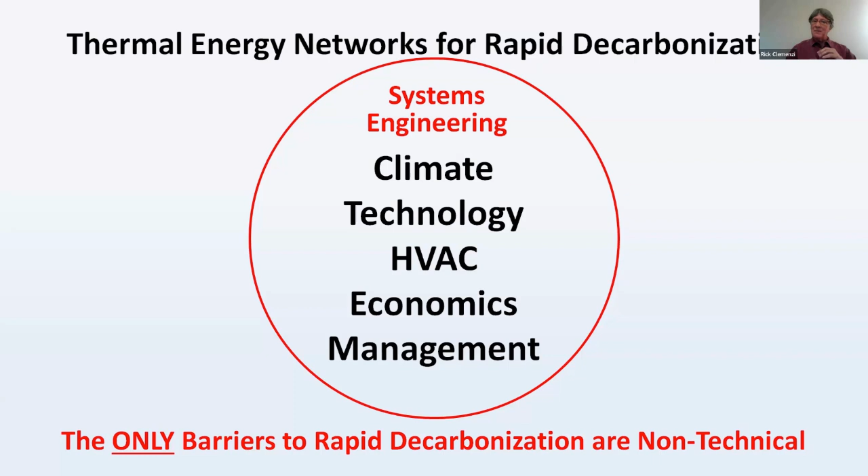Back to this original thing, there's all these different topics, and you got to think of these all together. It may not be systems engineering, it may be project management or whatever. For example, in this field, Kerry is not an engineer, okay, not a licensed engineer. He's what we call a designer in this field. You need the people who have the right experience to pull this whole thing together. That's key. The only barriers at this point, from what Kerry presented, are not technical. The thermals are out there, it's just managing the thermal, modeling it, figuring it out, and tweaking a system. The problems are all other things.

I saw this just in the news. Phil, I'm sorry to pick on you, but I saw this article that you wrote. It mentioned that Harvard is still trying to figure out how to decarbonize by 2050. And I just go, oh, come on. Clearly everybody's talking to the wrong people, because there's no way you couldn't decarbonize by 2050. You'd have to be really not trying to do it with the technologies we're talking about. And with that kind of climate thing going on with the ocean temperatures and whatnot, this is just not a problem we can all drag our feet on. So I just want to throw that in there.

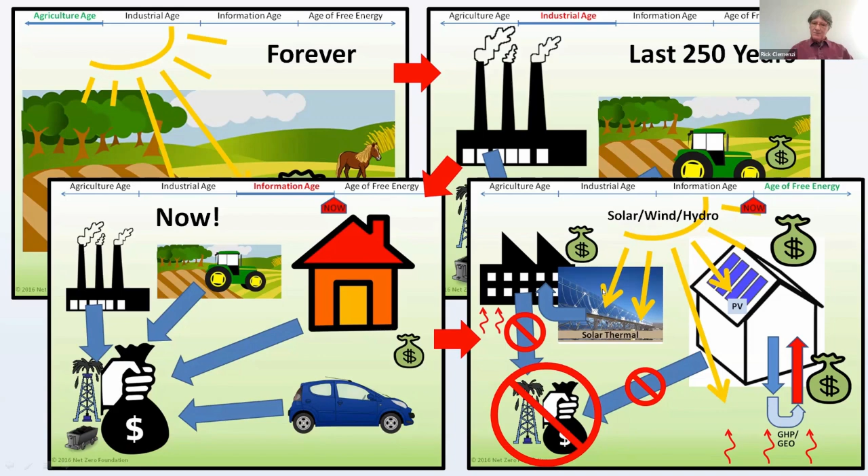Like I've said before, we sort of got used to this whole thing of paying the oil companies. The money is all there. As you saw from Kerry, these people are putting this stuff in and they're saving money. They're actually making money relative to now. What they're really doing is taking some of this money that everybody's shipping off to the fossil industry and saying, no, we're going to invest in the equipment, the geo equipment, the solar and whatnot for industry, maybe some other high temp stuff, and maybe some deep bore. And we can pull this off. The capability to pull that off is all there.

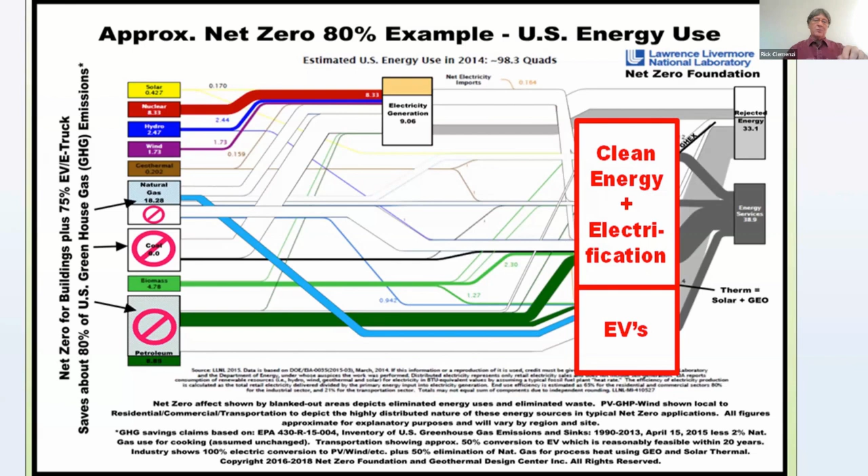I just want to run these through to keep them in your mind. The idea of eliminating all the fossil in this system, except for maybe airplanes and some ships, is all there on the table now, even for large construction equipment. And I showed this to you before, 13 years. It's happened before, a massive, complete change in 13 years. It can totally be done.

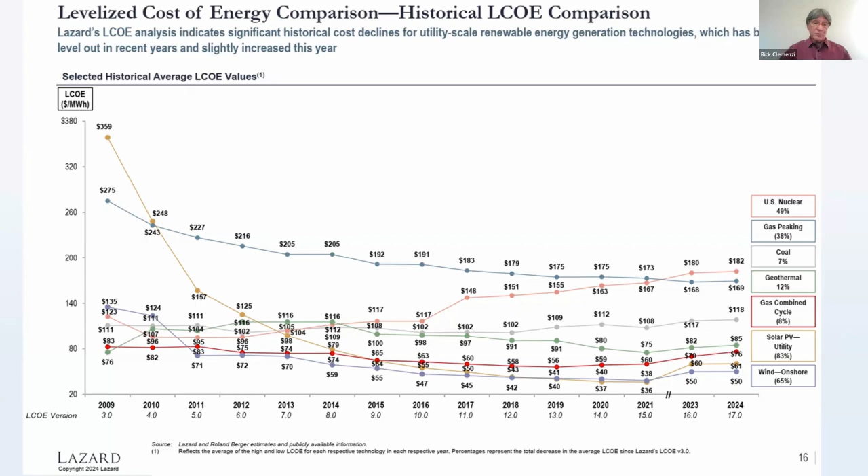Solar, this is the curve of solar. You see this exponentially declining curve, solar, starting in 2009. That's because the government figured out that this was a total winning situation back then and invested a bunch of money to get solar into bigger production. It just broke the ice and broke the whole thing open. So that's this curve, 2009, 2010, down to now, okay, somewhere in here. I'm sorry, these graphs are a little old.

This is exactly what happened with microprocessors in the 70s. I was in high school in 74, and the Intel 8080 microprocessor, one of those 40-pin things, was the first real microprocessor computer on a chip. It launched maybe in 73, and by 74 they were like $250. I made it my senior project because I was watching the price come down. By the time I bought one, in 74 sometime, it was $125 - it had already dropped 50%.

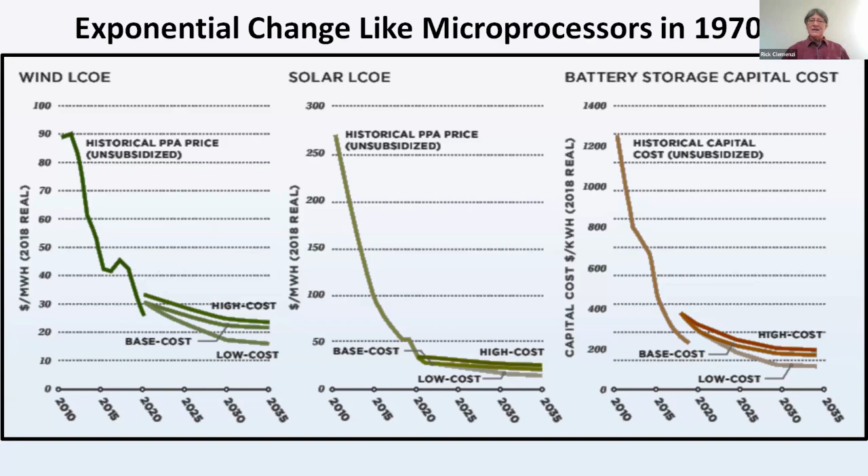Now that is clearly what started the information age. And along the way, a couple of things have gotten added - the internet, the TCP layers got added in the 90s, and now we've got fiber and everything.

But what these exponential curves are about - this was Andy Grove, one of the three founders of Intel. The whole thing, like Moore's Law - you've heard of Moore's Law, things in the computer industry keep doubling and halving in price. That's another one of the three founders of Intel. Andy Grove wrote a little book called Only the Paranoid Survive, on how to deal with inflection points.

When you see an inflection point, you should jump on board and realize the world has changed around you, because you can't fight those fundamental changes when things go really wild and drop in price by 90%, like solar has. That is a fundamental change, and it's going to fundamentally change stuff. And you can see it's totally happening.

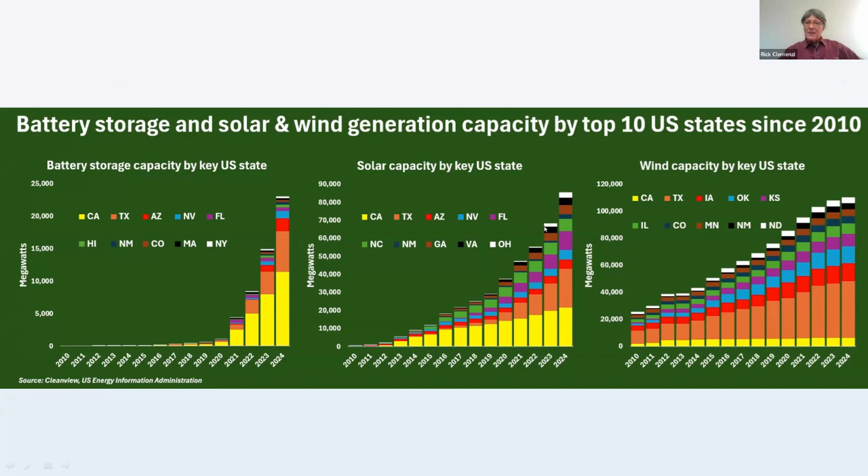This is what's happening with battery storage right now - it's just unbelievable, through the roof. This is what's still happening with solar - it's still exponential. We're being constrained now by the limit of the polysilicon market, by actually mining the materials - that's the only real limiting factor going on.

You guys are going to go see one of these net zero schools here soon. I don't know about King Open, but a lot of these places are doing this all with individual units, which essentially form a distributed network in the school. A two-pipe ambient loop just runs around the ceilings of the hallways, and you hang these units off with pumps built into them - they actually have no central pumping even in a lot of that situation.

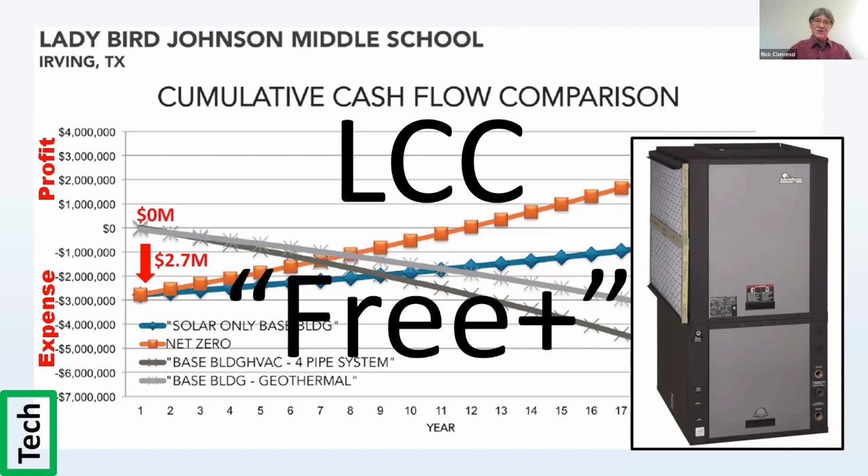So this is what I'm just trying to say - be confident. This change is afoot, and it's not slowing down. It is going to happen. And all of the people who haven't caught on yet, we just have to run past them, because they will catch on, but it's clearly taking them a while.

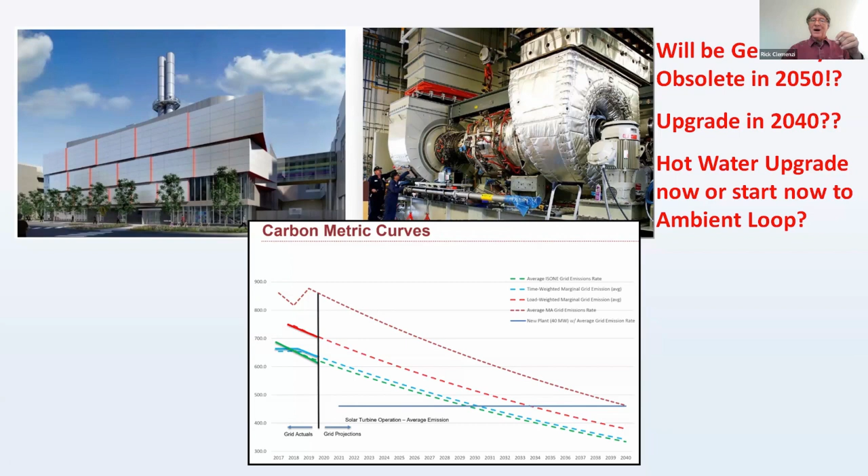So this technology of a jet engine - that's a jet engine, which is what MIT has in its central plant. It was a great, wonderful technology for what it was and is, which is a fossil fuel-based energy source. Perfect for that. Might be perfect for peaking and dealing with odd situations - something goes down, this or that, forever it could be. But it is essentially functionally obsolete now. You would never go and buy another one of these and put it in. Although there's a few industries doing that, but not campuses anymore.

So I'm sorry, I got a copy here and something. Back to the barriers - building decarbonization barriers. Why wouldn't you do this stuff, like Cary presented, these ambient loop systems?

They'll massively save money. There's huge rebates. They're less expensive to maintain, less expensive to replace. And any of the stuff you put in the ground is going to outlast your buildings, because this pipe, nobody has any idea how long it will last, but it's lasted its entire life, which is like 60-something years at this point.

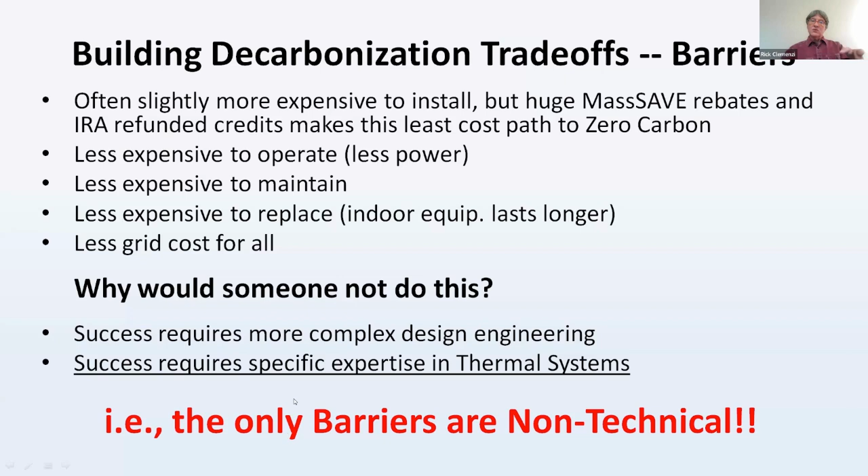So why wouldn't you do it? Because it's more complex, and we just got to keep teaching people. We got to keep telling people about this and getting them in touch with the right individuals who have the experience. The barriers are all non-technical.

Anyway, I just wanted to point out, back in 2016, the reason we're kind of here is we came with this knowledge. I'd been hearing these guys talk at the International Ground Source Heat Pump Association conferences. And once I saw that these schools are making money, it was like, okay, I can see this is a done deal. This is a concept breaker.

And so we came in 2016 naively thinking that we could go present this to MIT, and we got selected by the faculty to get this award for this in 2016, the Climate CoLab. And you can see from this little simple drawing, we sort of drew basically the same thing you've seen Cary draw. You got a network, and you got all the buildings and stuff hanging off of it.

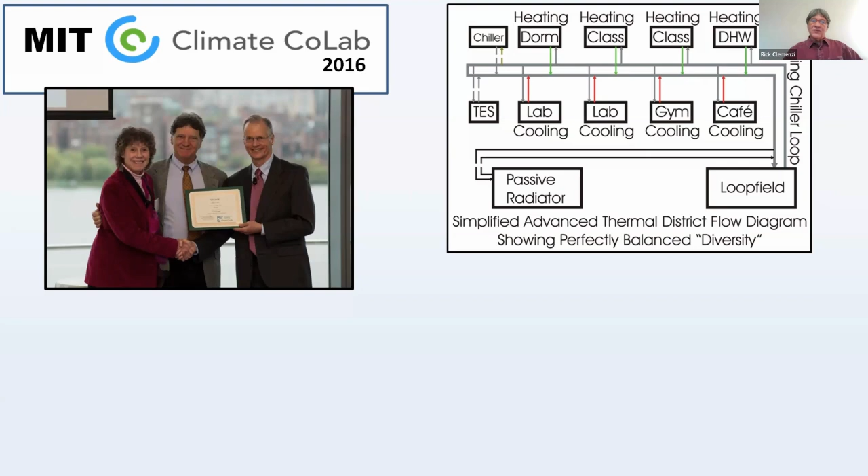Well, here we are 8 years later, and I think finally this year we're finally achieving some kind of breakthrough. And it's taken forever.

And we even gave them all these people. Look, Cary Smith, you recognize all these. Now Susan's taken the course from Ed Lohrenz. You just met Cary Smith. He's met Carl Orio. And the only person you haven't met here is Don Penn, and he's the guy who did the Lady Bird Johnson School and said, get rid of the steel. And now the industry doesn't use steel. So Rick recommended all of these people who are leaders in the industry in 2016.

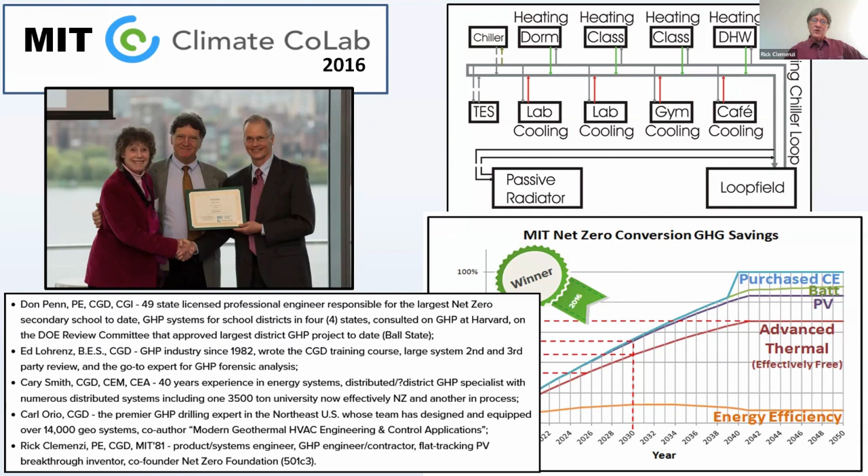It's amazing, 2016, put it all on the table. And really the program that you're going to learn about next, the proposal we've got on the table is really unchanged from 2016. It's just a little refined.

So even back in 2016, this was a graph of the economics—sorry, what's going on with the mouse here? Here we go. There we go. Even back in 2016, we were showing that geothermal had passed this effectively free moment, but PV had not. Well, believe me, PV has passed that effectively free moment at this point. So in 8 years, it has totally moved past this, and batteries have moved down here.

These things all have people investing in batteries because guess what? They make money. That means they are below this cost-benefit line. These things are rapidly moving down this technology progress curve and becoming economical, just in 8 years.

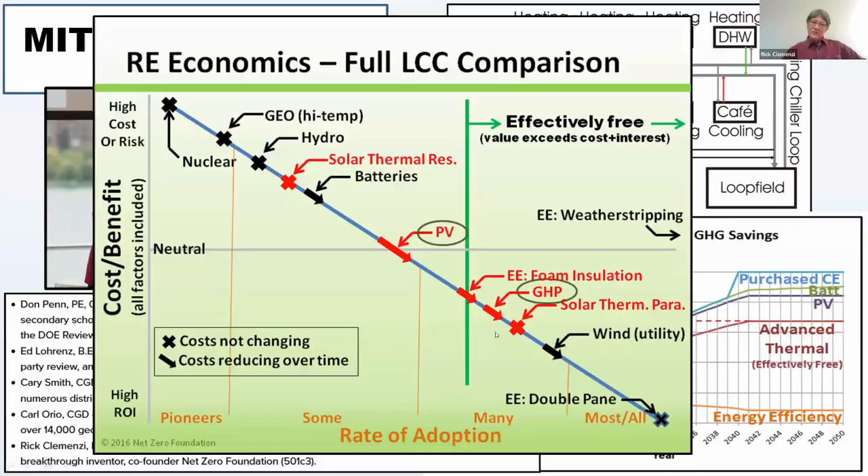And a key thing in this business is, like I was mentioning just before, you need the designer, the person who understands how to model these systems. They're more complex. It's not the guy who draws the plans that you really need. Why's the mouse disappear? It's not this guy that you really need.

You need the designer. And that's what the missing piece is, because, for example, the administration at MIT—point no fingers, because this is literally everywhere—the people we talk to in Asheville, everyone in this business talks to, it's the same issue: you go and you ask your engineer, well, what about this geothermal thing? And they don't know about it. So they give you answers that are incorrect.

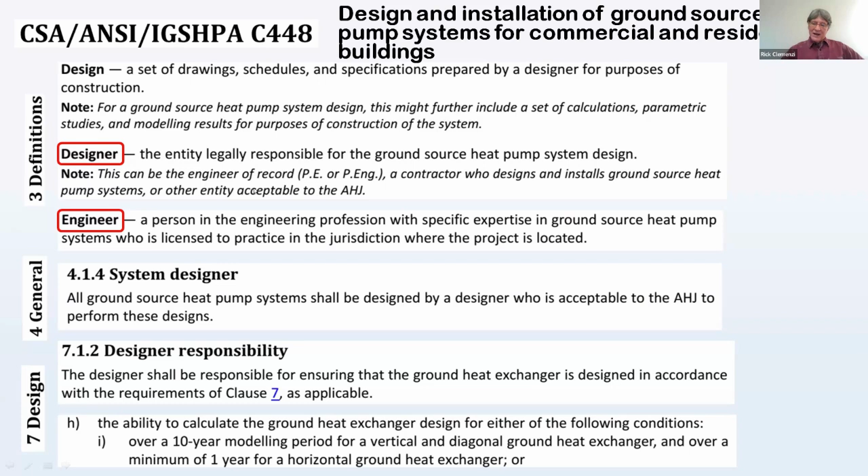Anyway, this is from the standard that's coming out. So if you all ever end up working with any governments or whatever on these kinds of advanced thermal systems, this is how you guarantee that something gets done right. You cite the standard. And this standard, the new version of the standard, the ballot's out right now, so it'll be out within a month, I think.

Question came up last week about St. Patrick's, so I thought I'd start here with New York. One of the advances that's happened in this industry is that this guy, Bob Wyman, was a Google plant. He got supported by Google to show up in the industry and started learning from everyone, smart computer guy. And so this is now the former mayor of New York signing a resolution that made it so all new New York buildings and major retrofits had to use geothermal unless engineers could show something else was more economical. The reason was because Bob figured out the issue here was non-technical. All the barriers are non-technical. So this basically said, okay, we're taking all these non-technical issues off the table, we're just going to mandate it, and then you guys figure it out and come up with something else. So that was a major thing, and that's kind of like the first step.

If you want to decarbonize, essentially what you do—this is about geothermal, but I'm really not trying to focus on geothermal here, this really is about advanced thermal. And the number one thing to do is to say, look, people, go figure out how to decarbonize these buildings. Then it's on the engineers to figure it out. And that is really the right thing to do.

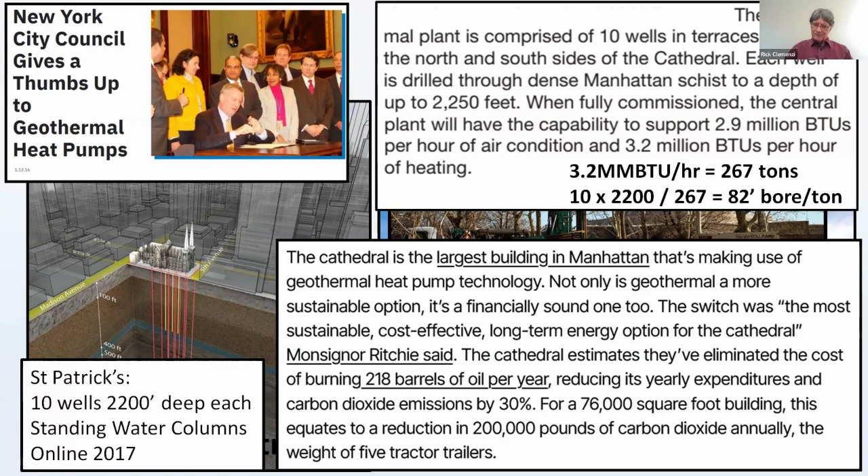St. Patrick's, I think I've got some stats here on it. St. Patrick's is 10 wells, 2,200 feet deep each, and they're standing water columns. It was done in 2017, came online in 2017. I just got a few stats here, you can look at these later in the slides if you really want. But it was completely successful. And in Manhattan, you've got very little space, so you do a different kind of thing—you do these very deep bores, and standing water column means that you bleed off a little bit if they get out of temperature. It's one of the technologies.

Folks at Susan's class also asked about the finance, so I thought it'd be good to show you this. Who knows if the IRA is going to survive, we'll see. However, the vast majority of the money—well, I don't know about the vast majority, but for sure the majority—has gone to red states, so it just might survive.

As an example, there's a workup on the spreadsheet from Climate Master, one of the major manufacturers, the people who make the most commercial geothermal equipment. This is for non-tax entities, like state governments and schools like MIT. We've got a geothermal system here that was going to cost, as an example, 1.1 million for conventional and 1.6 million for geothermal. So that's a $500,000 additive for the loop field and such, and there's some utility rebates, so that was going to cost 500,000 more.

But oops, I thought I had something else in there, I lost it—it was in Massachusetts. This is actually better, in that there's like a several hundred thousand dollar rebate, so $4,500 a ton right now in Massachusetts for pure geothermal.

And these are the tax credits in the IRA. This is the Inflation Reduction Act. There's a 30% for geothermal, solar, wind, all those kind of technologies, all those renewables. There's a 10% for domestic manufacturing, of which all the people who manufacture geothermal in this country are in the States. And there's a 10% if you've got a brownfield or something like that. That's actually for anyone who's even in a census tract around a power plant that used coal and was shut down. We have that here in Asheville.

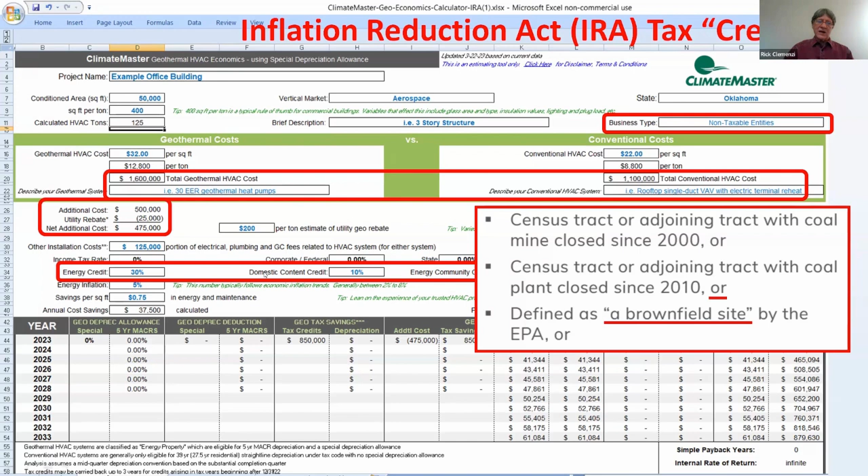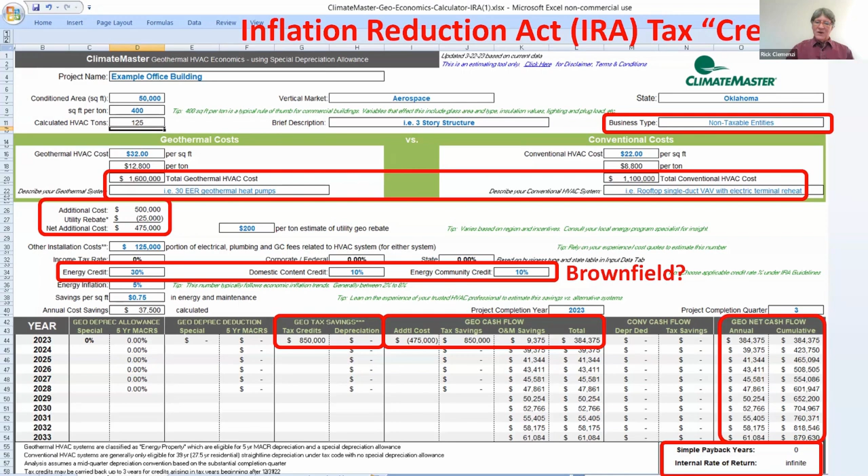And the bottom line is, in this case, with all those figures, the addition is $850,000, which is more than the $400-something thousand. So there's a net savings from day one. That's the way this works. So this is a profit from day one for anybody who can claim this. And it doesn't matter whether you're a nonprofit or, I think I have another screen here, a for-profit with taxes and whatnot. With this IRA, a lot of these geothermals are profit from day one.

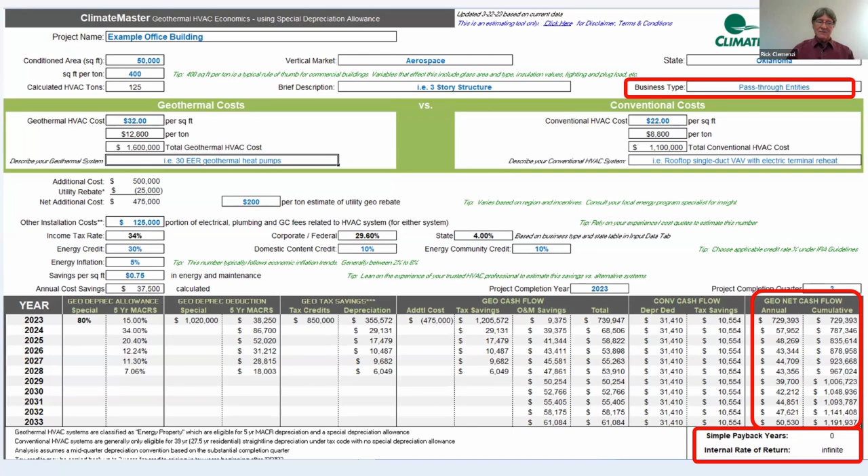And that's exactly what the government was trying to do, is to say, let's juice this system just a little bit, get it going, get people on the road to decarbonize. And I think it's happening, because I'll tell you, the geothermal business is like the volume got turned up bad. So that's good.

If you want to learn more about these things, there's a tax compendium by a guy in Boston who's a tax attorney. He has a list of all the credits. You can go there and get it from him. He'll gladly email it to you, or it's on his website. And in the geothermal business, if you really want to know about geothermal and building decarbonization, that kind of stuff, this guy, Jacob Goldman with Energy Tax Savers, he's the go-to guy. He presents at all these conferences. He really knows all this stuff, and he's got package deals for him to do the accounting for it.

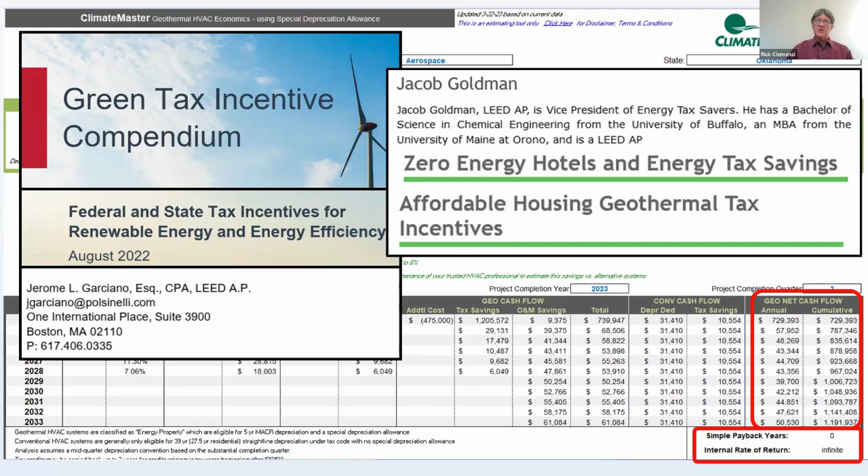Anyway, there was another question about. Yeah, you got 5 minutes, 7 minutes, maybe. Really? That's all? Yeah, okay, because we have to get there by 4 in order to have daylight on the roofs when we see the solar PV. Okay. And down to the cars, and we have to find our way there.

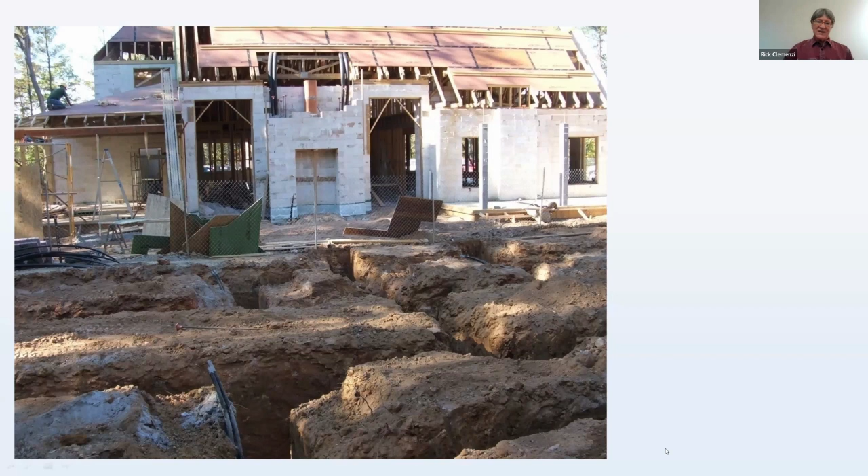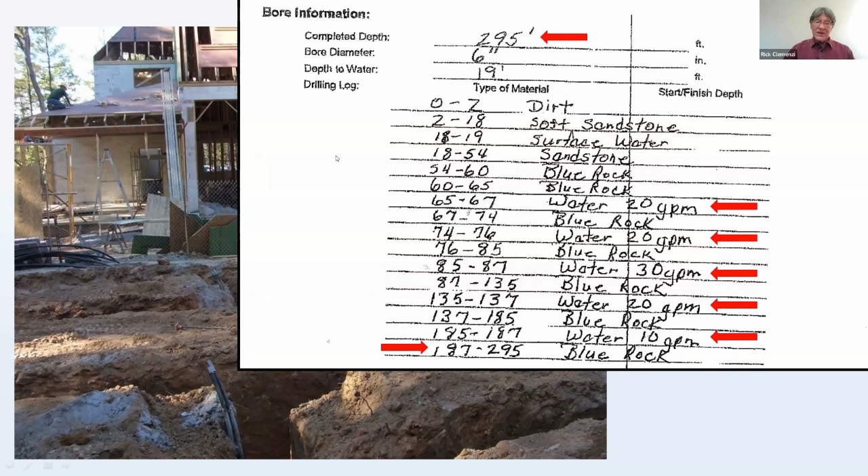Yeah. So another barrier is engineers who don't know what they're doing. This is an example of a job we got doing the chancellor's house at a university. And this engineer, this thing of digging all these trenches like this, it's insane. But that's what this engineer did. Some more insanity of the engineers who don't know this stuff. Here's an example of a well log for another job. And you'll notice water. Okay, so there's a lot of water coming out of this ground. And it's only, I'm sorry, I've got this thing blocked, it's only 300 feet deep. So then the guy goes and specs the job at 450 feet without having even drilled a 450-foot bore.

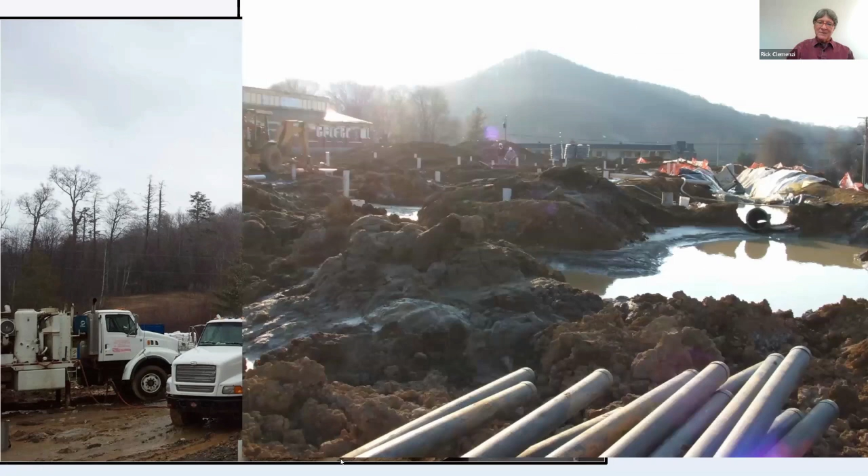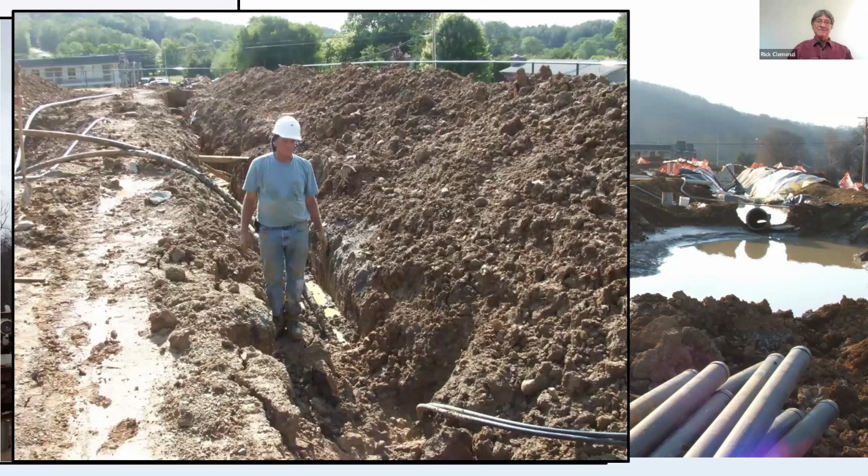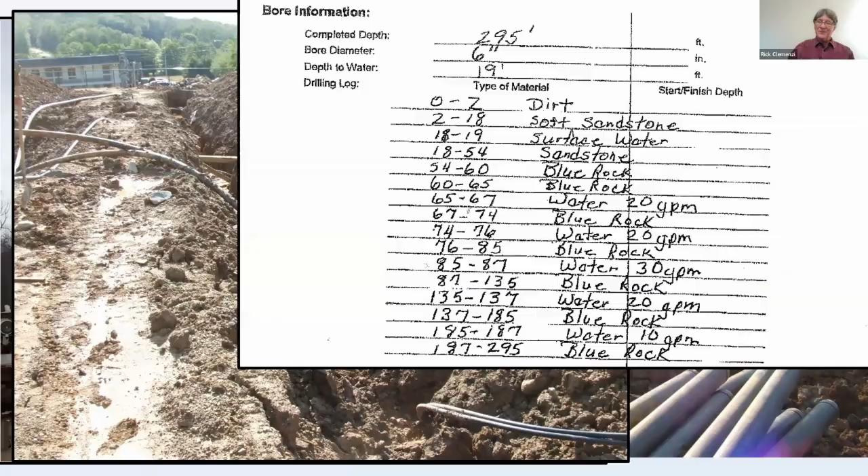And the job turned into this. So this truck over here is drilling air rotary and blowing air into the loop, the water down there at depth, and it's geysering up over here, and you can see rocks. There's rocks coming out and raining down on this truck, sitting on top of the truck. It's the most insane thing I've ever seen. It's a total disaster. And the disaster was because the engineers just go and do their thing without actually learning about this field, and they caused this. This poor driller lost his shirt on this. We lost our shirt on this too, which was bad. That's collapsed, wet, muddy ground. You can't dig in it. It's just a disaster.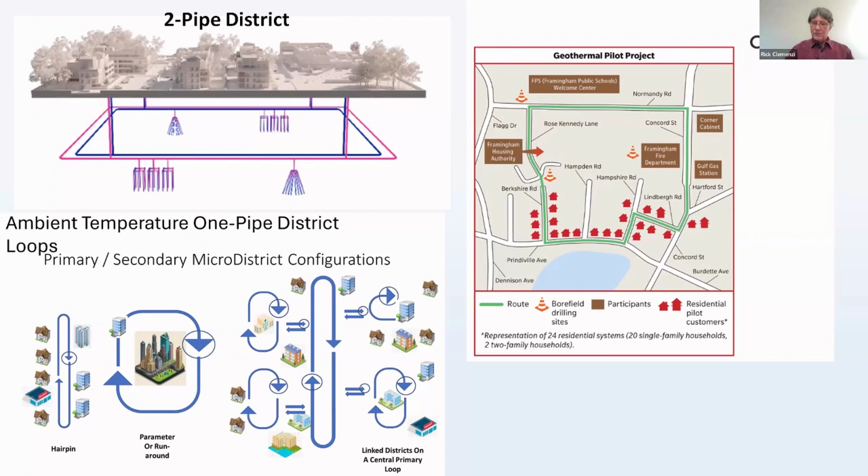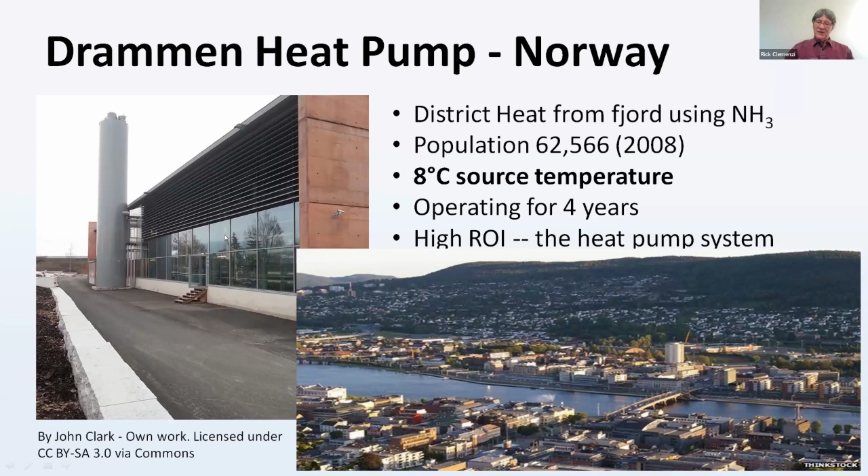Let's move on to some really out-there things. This is in Norway, off a fjord, so you know how cold that's got to be. This is a giant heat pump in this building, a giant electric heat pump. It actually produces some really hot water out of this thing.

It's not very efficient. See, this is temperature out, temperature in, and these are the efficiencies. This is almost a generic graph about heat pumps. If I'm coming in at 40 degrees and going out at 60 degrees, I can get really good efficiency out of the thing. But if I'm coming in at Boston Harbor temperatures and trying to produce really hot water, the thing is barely going to work. Understanding this curve about heat pumps - this is a particular model, but understanding how these temperatures relate - is of course critical.

For example, one thing that's happened lately is somebody asked engineers, can you create steam from geothermal? The answer is no. I mean, you can, but it's not efficient. So if you're going to decarbonize, you've got to separate these concepts - efficiency matters.

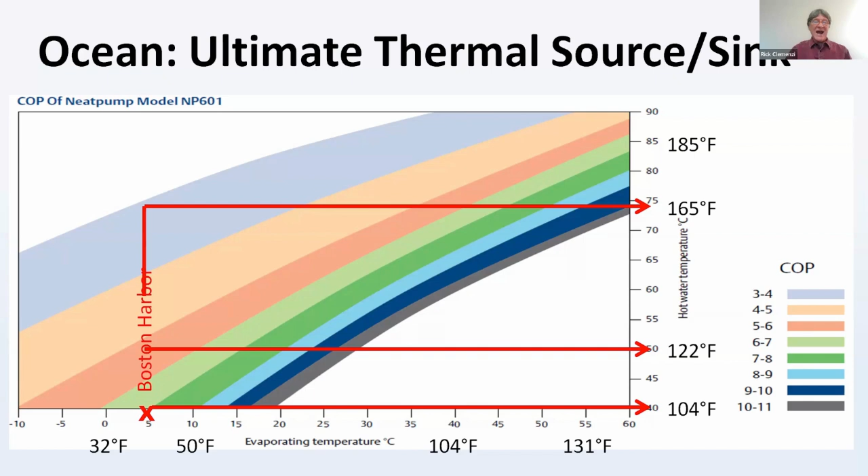I know this is a mosh of stuff. I just want to give you a sense of all these different aspects so you realize there are people who understand this, and those are the people you have to have involved. Because unfortunately, if you don't understand it, you don't.

Here's a great example, Susan, of not much geothermal. This is a giant IKEA store - you can see the size of the cars, it's very big, 3 stories tall. It's got like 4 or 5 restaurants in it in Denver. The problem here is not getting heat - it's in Denver, so it's cold, right? The problem is they've got too much heat in this building. A giant box with a bunch of restaurants - they have too much heat.

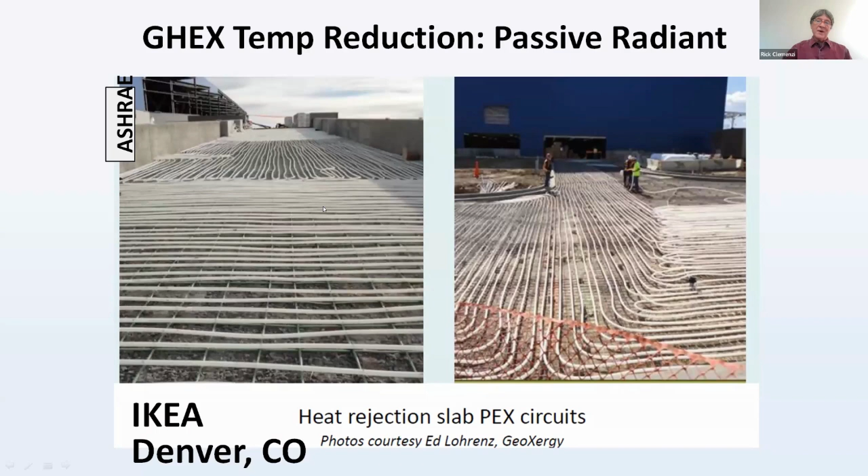So this entire huge building has something like 27 geothermal bores. 27 bores is like nothing in a building like this, but it's got this giant thermal radiator for getting rid of heat. This is under one of these concrete ramps, around the back somewhere. In the concrete are PEX loops acting as the thermal radiator to get rid of heat. So there's another source - a thermal radiator. In Massachusetts, you'd put loops under all your sidewalks, handicap parking places, crosswalks, stuff like that, to do snow melt. That's how you get rid of heat.

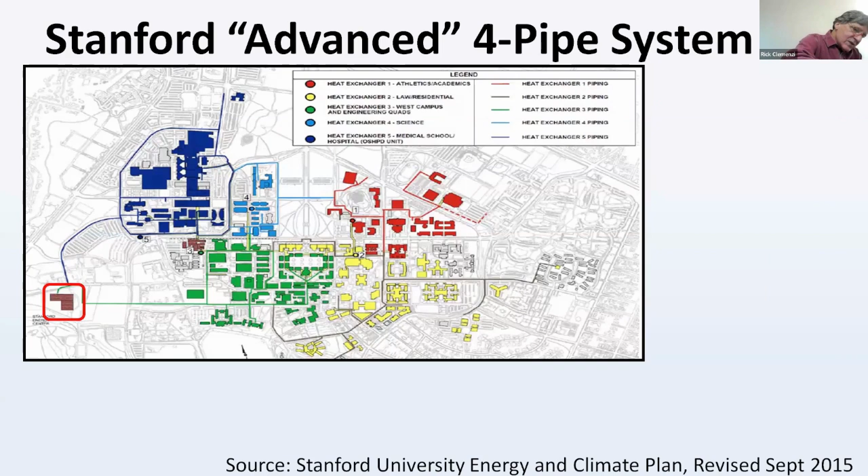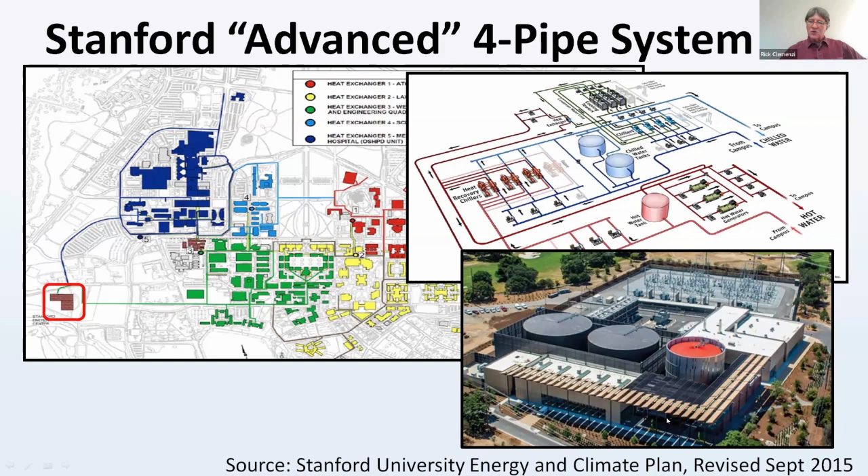Here's another example of a campus system that did a district, sort of - but they did a 4-pipe district, not an ambient loop. So you've got this campus, look at this. Something worth knowing is they built this giant central plant, which is sort of one of the things that's been proposed at MIT - giant tanks and a big central plant building. Yeah, it works, but what is this place?

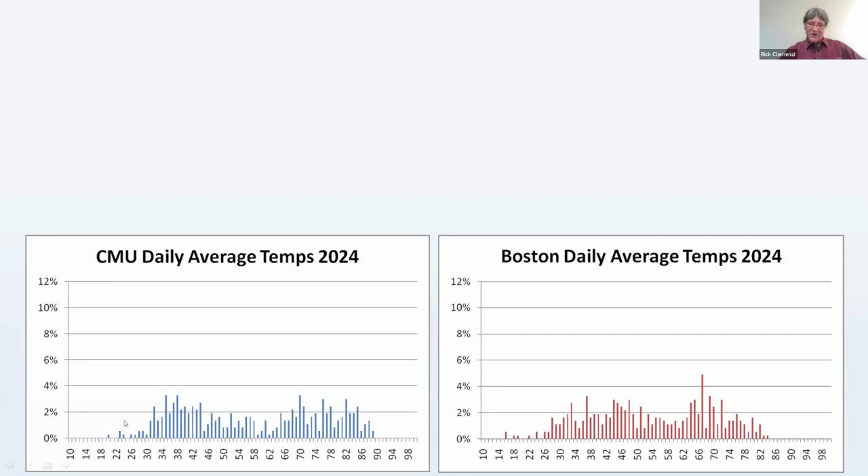Boston has an energy pattern like this - this is your daily average temperatures and what percentage of the time. You can see Colorado Mesa has basically a very similar pattern. Stanford has that pattern too. So it is completely not a peer location - it is not a corollary in any way to Boston. And yet that kind of big system is one of the things being proposed in Boston.

So if you go in with a 4-pipe system, you have to build that much pipe - you've got to serve all the way to that peak, and all the way to that peak. Putting that 4-pipe in, Stanford put in 20 miles of new pipe, buried in trenches and new trenches. That's a lot of campus disruption. For the central plant concept, it cost $485 million.

And they say that it would save 420 million over 35 years. Well, saving 420 million on a 485 million project, you have to add the discount rate in there, because of course you discount everything in the future money-wise. Basically, this system is just losing money. And that's fine, if that's what you want to do.

But it's just so out of step with what this advanced thermal world is doing. And so there's another example of this, which is what putting in miles and miles of pipe does. You just get these giant digs and stuff, which you really don't want. So that system, that's the 4-pipe version.

The 2-pipe version is going to be something more like that. That's how much pipe you may need to have, and that's how much thermal you need to support, because these peaks are going to get supported just in the inertia of these systems, because peaks are usually not very long. So you don't need the full capacity. You heard Carrie talking about that, how you've got really a much smaller amount of net system installed for peak capacity once you get these diversified 2-pipe systems involved.

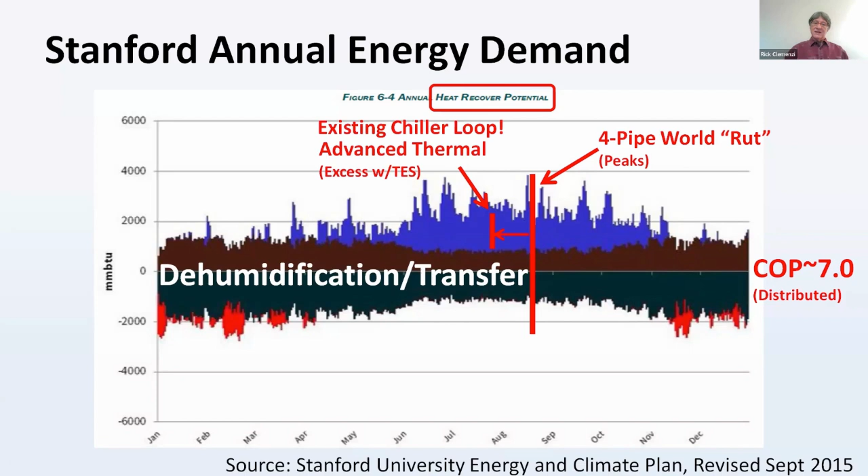So that's what the advanced thermal is about, that kind of a difference. And at MIT, this pipe already exists, so it's not needed at all. So that's the existing chiller loop at MIT. This is what the difference is at MIT, and I think I'll show this again next week. This is what the difference is.

This is what we are proposing. You have to add a line here, a couple little lines here, and one line out this way, an ambient loop. And all of those same lines would have to be added in a 4-pipe system, like is being advised by others, by engineers, for MIT. So all that has to go in no matter what.

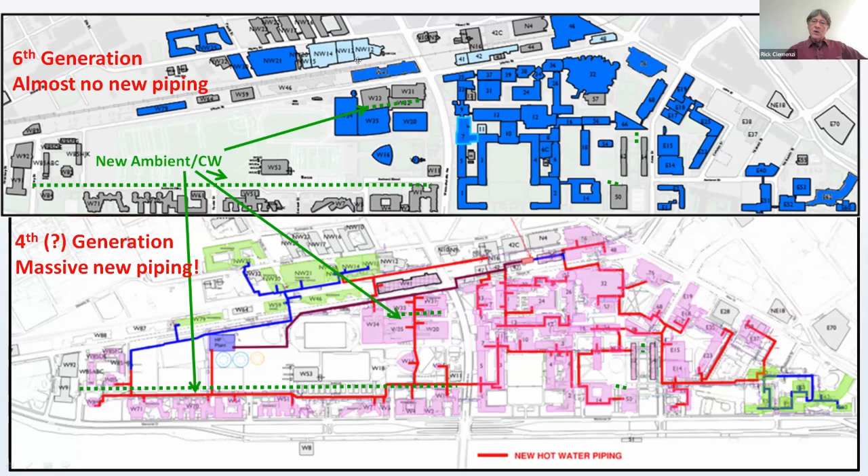And for a 4-pipe system, all of this red has to go in as well. And not only does all this red have to go in, but this red has to go in as steel, because they're talking about high temperatures. And that is massively expensive, and is the real thing which will probably shut down that approach, because that's a waste of money when all you need are these few pipes, and you don't need them as steel. You put them in as HDPE or polypropylene, these fusion welded pipes that this industry uses from the oil and gas pipeline business. That's where it comes from.

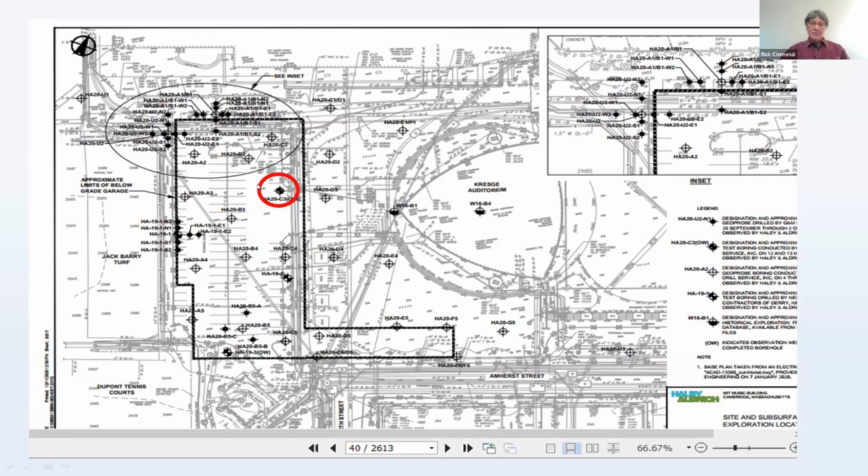So we did some tests of this little building, this spot right here behind Kresge under the now music building. This particular bore, we had a good log to depth on. You can see I've cut it up here just to show you, but you can see at 10 feet depth, 25 feet, 50, 100, 120. They hit bedrock at 120 feet.

So MIT is sitting on a pile of totally wet, saturated clay. That's what it is. It's a coastal estuary, with a little sand on top and a little bit of fill on top. People think of it as like, oh, there's so much fill. It's like, oh, no, there's not. That was a tidal river basin. So it's not that deep to what it was before the fill.

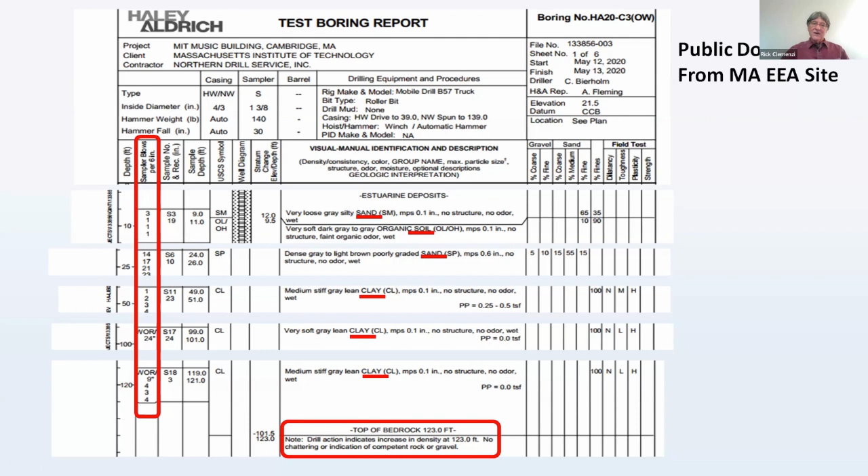And so based on that, there's other approaches. Actually, that approach we now believe isn't the right one. So I'll skip that.

So after what Carrie said, I think we've been proposing this based on research out of Oak Ridge National Labs, using thermal batteries in this 100-foot overburden. So incline drilling, we'll probably end up doing some incline drilling. I'm sure we'll want some of that good solid rock kind of thermal conductivity. But there's this giant opportunity, especially in what you saw Carrie was talking about, of just storing some energy to be able to retrieve it when you need it. And that's the next generation in this field.

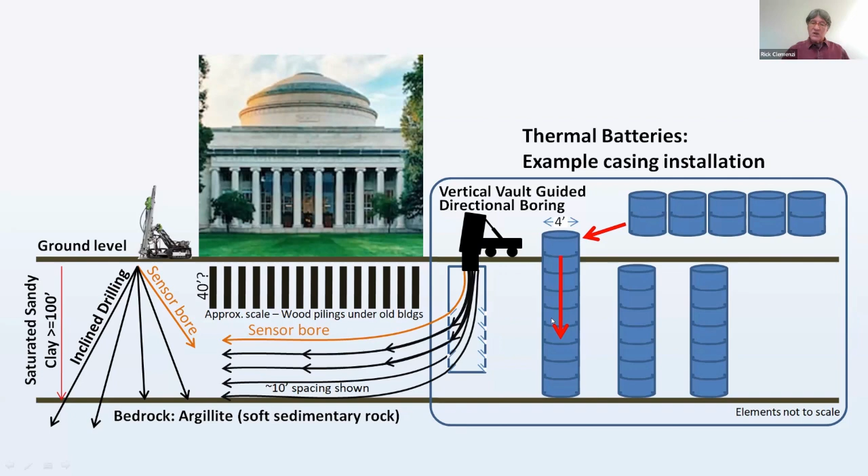So you see this progression in AI. This industry of thermal is on that kind of a progression as well, and we're kind of at the 2000 point in the computer industry progression. So there's things like this to come, and probably a lot more to come as people get creative, like the angle drilling and whatnot. There's a lot still to come in this field.

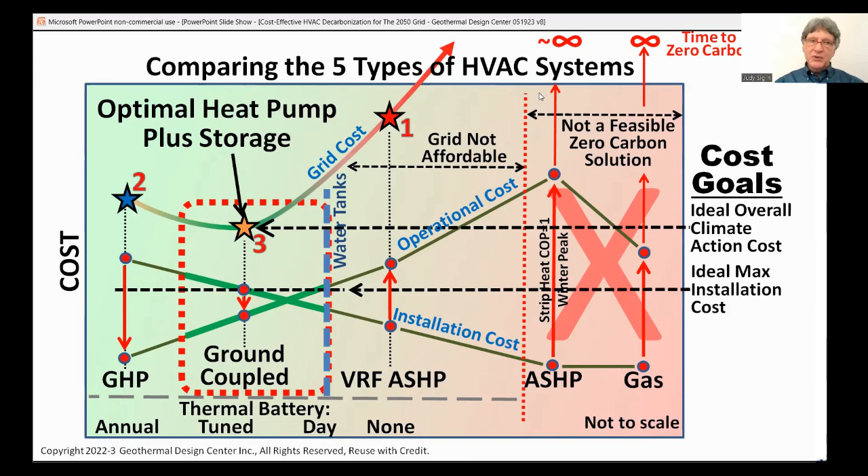In the course of trying to help explain to engineers what the next generation, Gen 5 and Gen 6, of HVAC systems for the 2050 decarbonized grid will look like, we've created this graphic. It's a bit complex, so in this brief presentation we're going to build this graphic and help you understand what it is, why it is. We used to call it 5 kinds of HVAC. Now we think it really should be more closely called cost-effective HVAC decarbonization for the 2050 grid.

This is a byproduct of work we've been doing with the MIT D-Lab, taught by Susan Murcott and working with her students. In this course, we gave a presentation in May on HVAC design for the clean energy grid, and this is an extract from that presentation. I'll show you a link to it if you want to go see it.

Let me tell you who we are. We're a combination of things. I'm a computer engineer by training - that's career A. Career B is in HVAC, developing products in this field, and being an expert in the geothermal heat pump field. We just do a lot of stuff, and I'm on the Binational Standards Committee, so I know a lot about this stuff and can try to help convey this information.

In that longer presentation at MIT, we resolved these questions. Will it cost too much to decarbonize? You can go listen to that - no, it won't, definitely not. A lot of people say we don't have the technology to decarbonize, and for buildings, that is bogus. It's just not true. There are a few things like Bunsen burners and all, but I think we showed that people have solved some of those too. I don't know what else there is on a big college campus, but I think in general, we have all the technology.

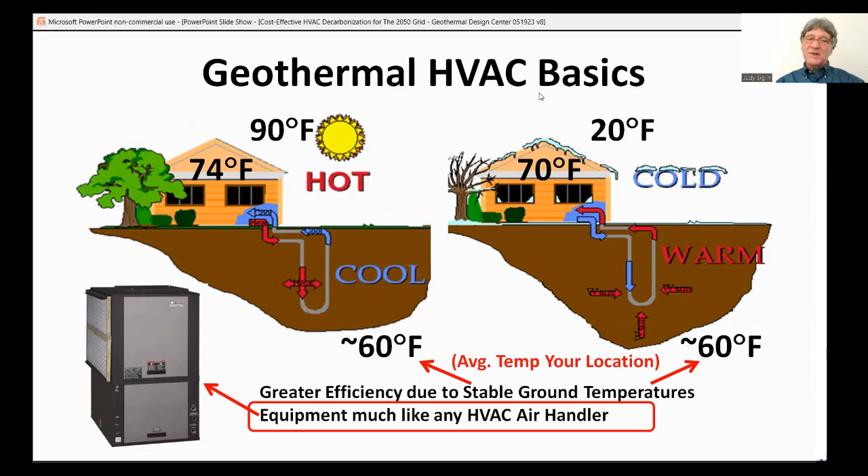Just so you know what geothermal is - everybody knows, on a very hot day when it's hot outside, you've got to use that 90-degree air to try to cool your house, and when it's cold outside, you've got to try to use that 20-degree air with an air source heat pump. Well, geothermal uses the ground, and the ground is a very stable temperature that vacillates a little bit around your average air temperature where you are. So your average air temperature determines that ground temperature. It all uses just basic equipment like that - looks like a furnace box, like any other furnace box. Nothing magical.

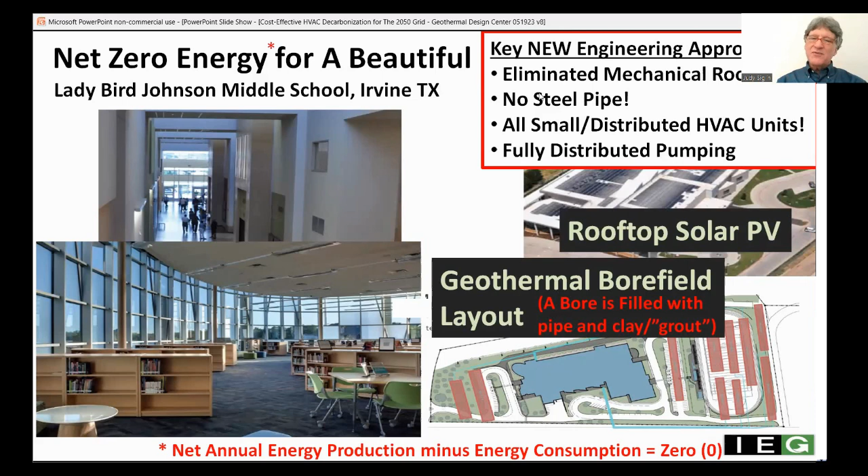Here's an example to show you how this field has advanced. This is a middle school done a decade and something ago in Texas, a beautiful school. This engineer set out, after 100-something geothermal systems installed, to figure out how to do a net zero energy system. He made some advancements, which I cover more in the longer course, so go back and look at it there. But basically, it's all the same box, just the horizontal mode of the box up in the ceilings.

So that's not true everywhere, but it's kind of true right now with the IRA tax credits everywhere in the US. Now that makes a bunch of money. So that would save you $2 million over the course of 20 years anyway.

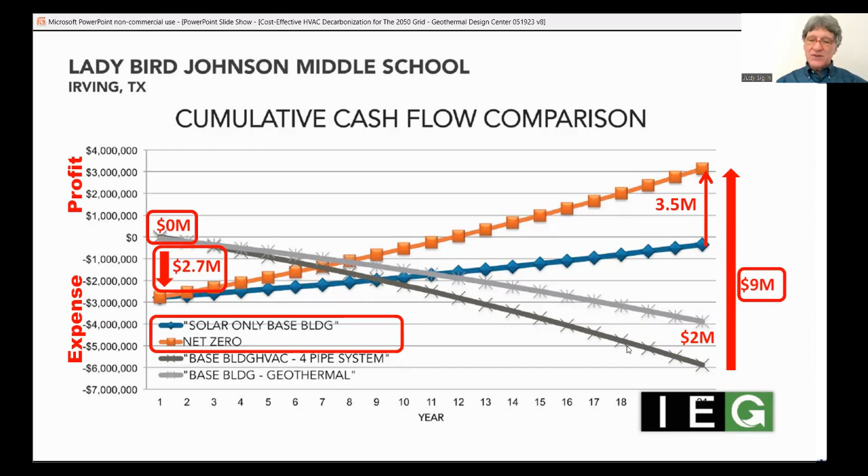And apparently this system's worked a little better than they even thought. Add solar at the time, 2.7 million for those rooftop systems you saw. And that saves you over time 9 million in 20 years. And that's not even the full life of the system. It's already effectively free. It already turns a profit in 20 years.

And it's not even the full life cycle cost, which is even better, because the ground loop in geothermal is going to last over 100 years. That's the official life. Nobody knows how much longer it will last, but it's some long time.

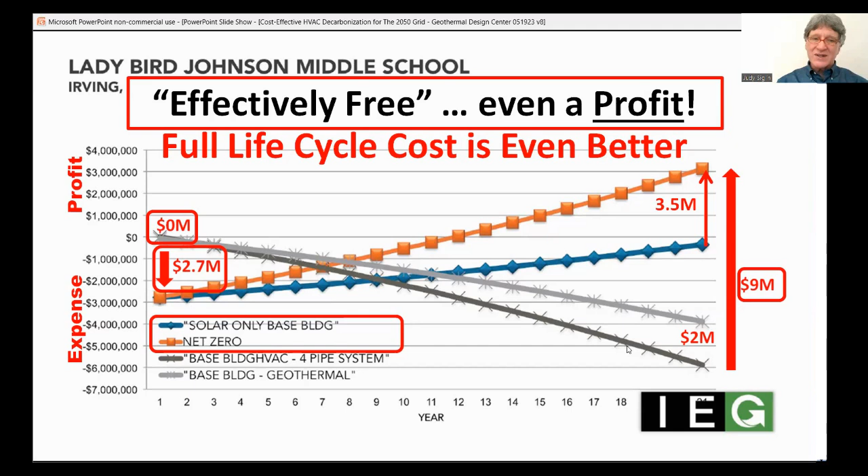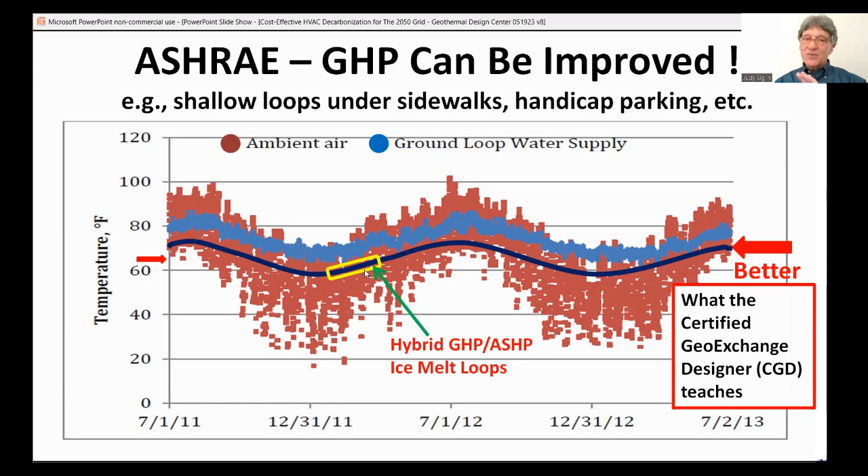And so that's where it should be running. And there's ways that you do this. You tune it by wasting heat out of the system in the spring when it's very cool in the evenings and the power is very cheap. So there's specific ways you do this that are known by the people in the field, not known by others.

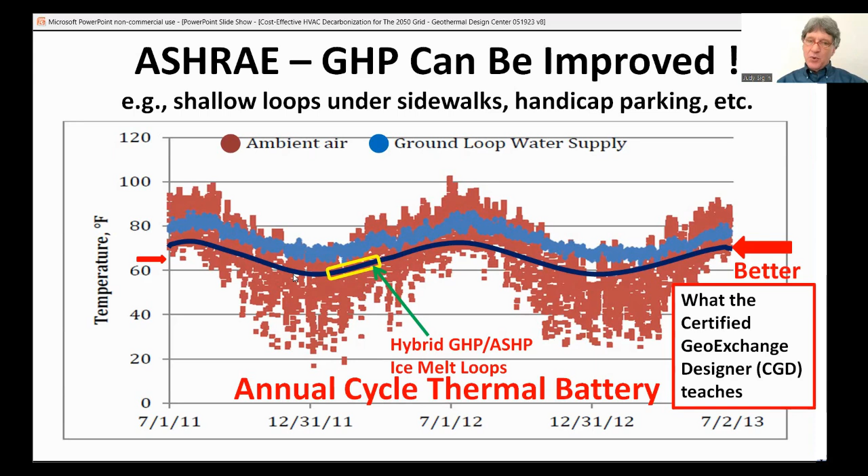You put in maybe ice melt loops under your sidewalks and under your parking lot areas and stuff. And you just use those in the spring to waste energy, or when there's snow and ice. It's an annual cycle thermal battery. That's the key point. This thing varies annually with its load. This big chunk of earth under a building.

So let's pull that together here. And instead of thinking about these as heat pumps, let's now think about what the thermal battery is involved here. So for example, in the air source heat pumps, you have no thermal battery, and in the ground source heat pump, you have an annual thermal battery.

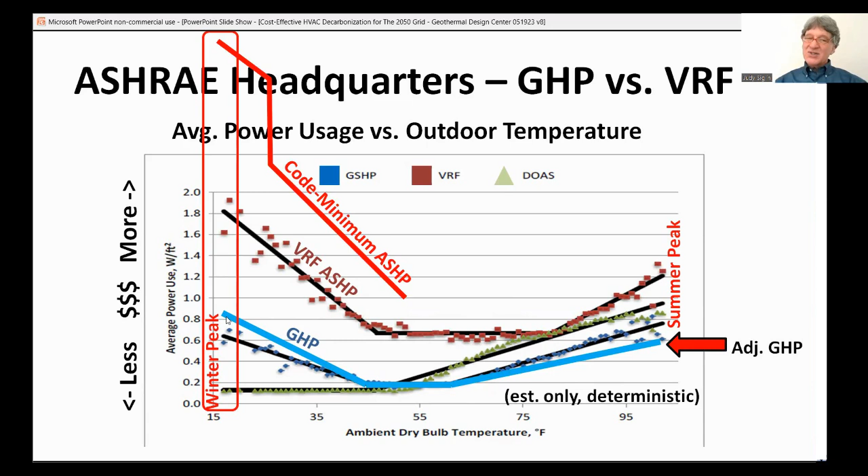So let's overlay what a basic air source heat pump runs as, and that thing is much less efficient than the VRF. The big deal is that when it gets really cold, down to maybe below 25 degrees or so, these things cut into electric strip heat, and that is a much more expensive thing to run. What they call coefficient of performance then is just electric strip.

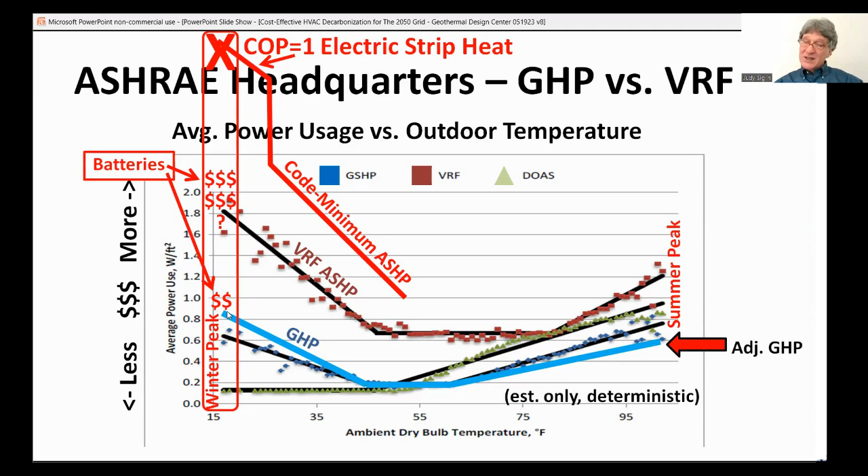We'll never be able to build the grid for that. You can't build a grid for 4 times the peak when you can build 1 times the peak, so it will never happen. And in reality, even building the grid for the VRF versus the geothermal, it's going to cost an awful lot more. We don't know exactly what this trade-off is, because there's installation, which is costing more right now. These batteries are 3 times as much electric versus this, but it's a little more complex, needs to be modeled to understand it perfectly. So looking at that, first of all, the air source heat pump, there's no way we're going to build the grid for that, so it has an infinite time to market as well.

And then including that, this is not a feasible solution. So those are all not feasible zero carbon grid solutions, zero carbon society solutions. The air source heat pump, the high ends have a coefficient of performance of somewhere around 1.8 or so in the winter peaks, maybe 2 in some circumstances, depending on where you are. So they're twice as good as the basic units. The geothermal is 4 times as good, and that's why this operational cost curve goes down like that.

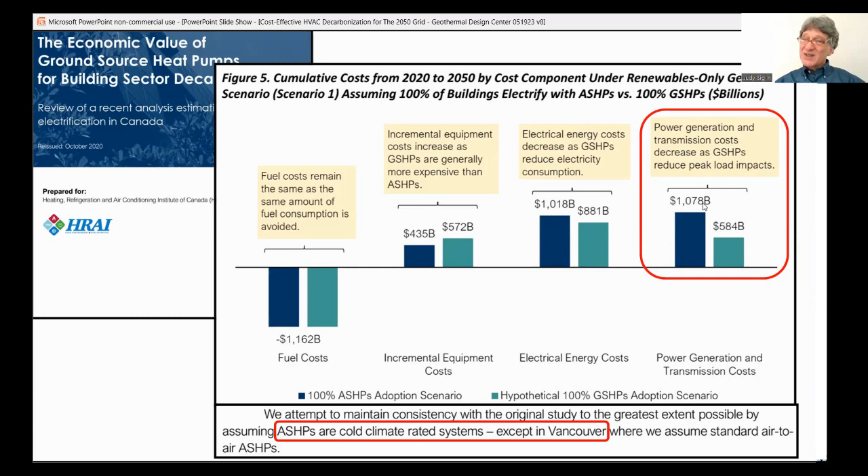So looking at the grid, there was a study done in Canada for the Air Conditioning Refrigeration Organization there, and they found that using even those high-end cold climate heat pumps, the grid will cost almost twice as much if you use all air source heat pumps versus all geothermal heat pumps. Going back to this graph now, that creates points like this. So even with that, we start to understand that even with all these air source heat pumps, it's still going to be very expensive to build that grid, but they're going to have a much higher cost to the grid than if all geothermal heat pumps.

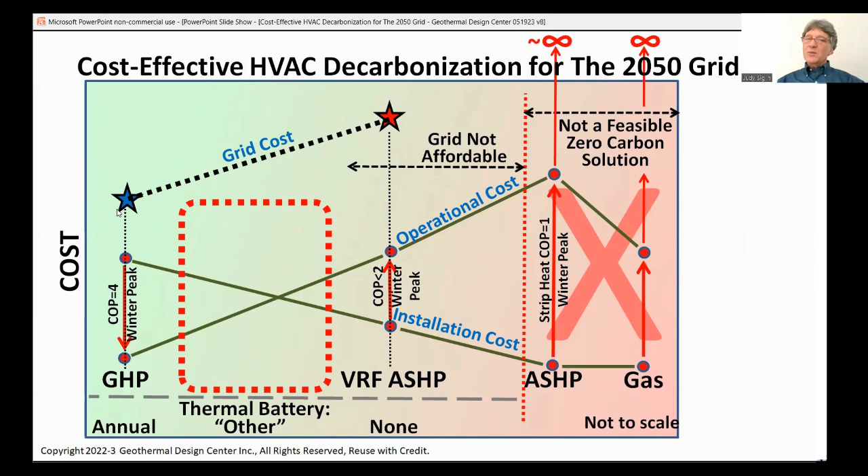What we're going to show is there's another class of batteries in here. Let's just call them 'other' for now, and they are going to produce something better. We're going to show that they produce an even better cost curve, that we can do better than just conventional geothermal.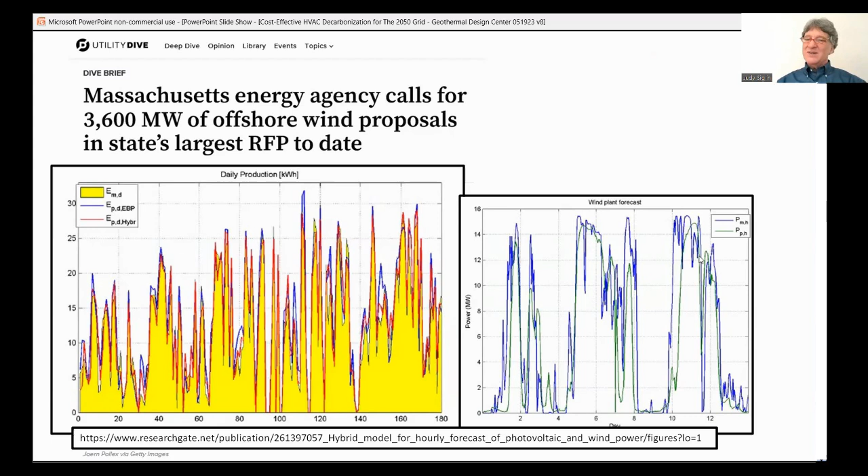So we know there's a lot of wind being built. Here's what wind looks like from the energy delivery point of view. It's chaotic, it goes up, it goes down. You have times with massive amounts of wind, times with just moderate amounts of wind. And if you draw a line here of what you expect to get from your wind, you'll see there's a lot of blank periods where you would get much less, sometimes zero. You got to watch out, because this will coincide with when a snowstorm hits - you'll get no sun on the PV panels and you'll get no wind. So wind, even during a day, you can see it's chaotic during hours of the day.

Switching to solar, you can see solar is chaotic too. It's up and down, it's got periods of overcast for days. But we right now have built enough solar that we've got almost all the power we need at certain times during the day. In fact, by 2050, people expect that we're going to build double what we need to get the whole grid to operate. So there's going to be a lot of excess power. There's going to be some periods of really expensive power that you don't want to have to buy, and there's going to be some periods of really cheap power when you want to be able to use it if you've got some way to use it.

Well, this stuff has already happened in California. They've already hit zero and beyond for their power production. They're already cutting solar off the grid, what they call curtailment, where they say you can't connect to the grid. That's already happening all the time, even when you would think we still need more renewable energy, but it's not a perfect picture.

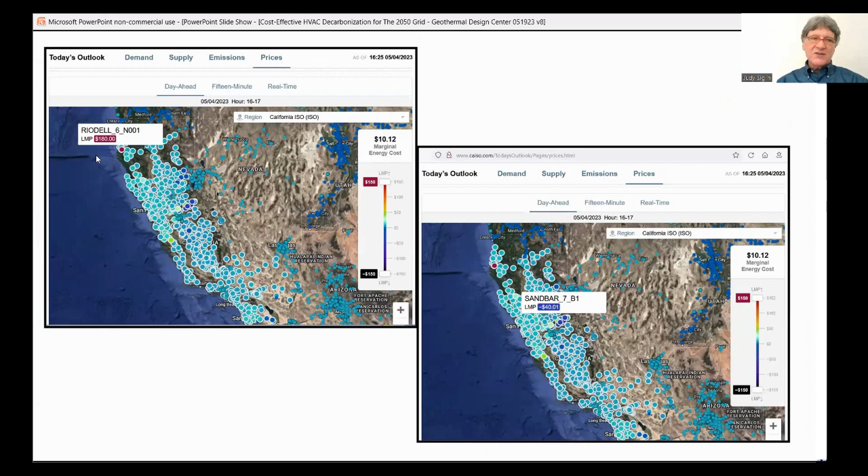Right here you can see the marginal pricing for power goes way up and way down depending on where you are, the time of day, and where the sun's shining.

Here in Texas, for example, you can see in the western zone versus the northern zone, through 2009 and 2010 even, there were all kinds of periods of negative cost of power from wind. This is a long time ago this started. It's just getting worse and worse.

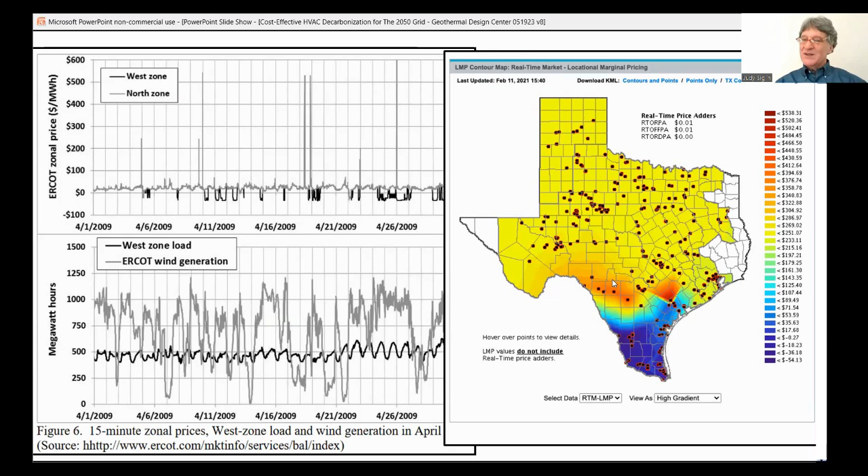And this you can see from much more recently in 2021, a period of some really low, like cheap, better than free power, below zero because they had too much on the grid, and periods of expensive power in different areas. So this whole thing of power fluctuations is a big deal.

And that's where these thermal batteries come in. They can store the energy. So if you can get really cheap power, you can use them to store it.

So those thermal batteries, first off, there's what's called water tanks, and people have been using these for a while, especially in summer times to store up cold at night and then use it in the afternoon the next day. That's been used for a long time, but people think, oh well, that's just a way to store cold. It's like, no, it's not. It's a way to store heat and cold with heat pumps.

So that's a day-long battery. That water tank is a day-long battery.

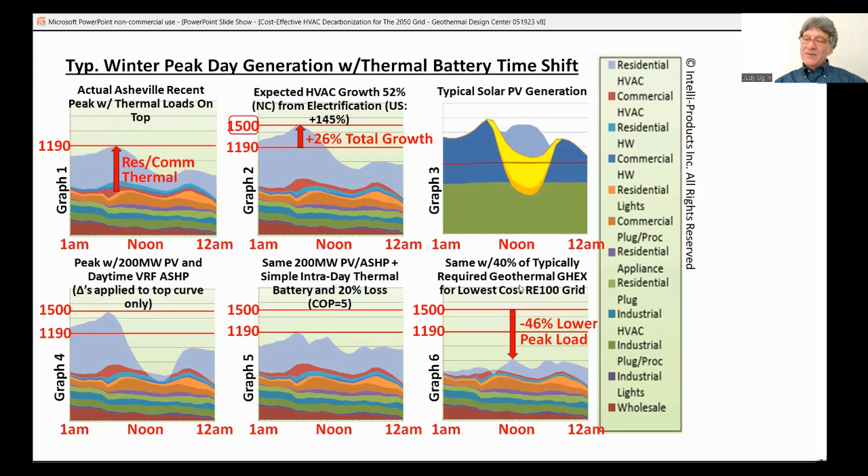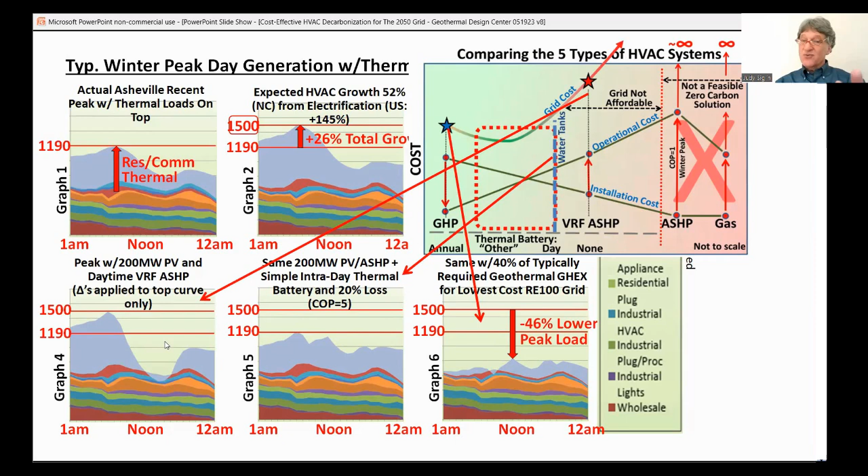And then how you can get with geothermal even lower. So how do these match up here? Well, there's the water battery, there's the air source heat pump by itself over there, there's the water battery, and there's the geothermal battery. So there's sort of a grid-applied real example of what this graph does.

So on here now, that other one, what is that really? What are those things? Well, here's one example. This is a type of battery designed by Dr. Xiaobing Liu at Oak Ridge National Laboratories. He's got one of these installed. I made a couple of these installed, but he's got one in particular at University of Illinois, Champaign-Urbana, and it is 2 feet wide and 20 feet long, I believe.

HDPE, basically a culvert stuck down in the ground that has a water battery with some phase change inside, and he's got pipes coming out of this several different ways. Basically, this is a 3-in-1 battery. It's a water battery, it's a phase change battery which will store longer, and it's a ground battery. So it's all 3-in-1, which is very cool.

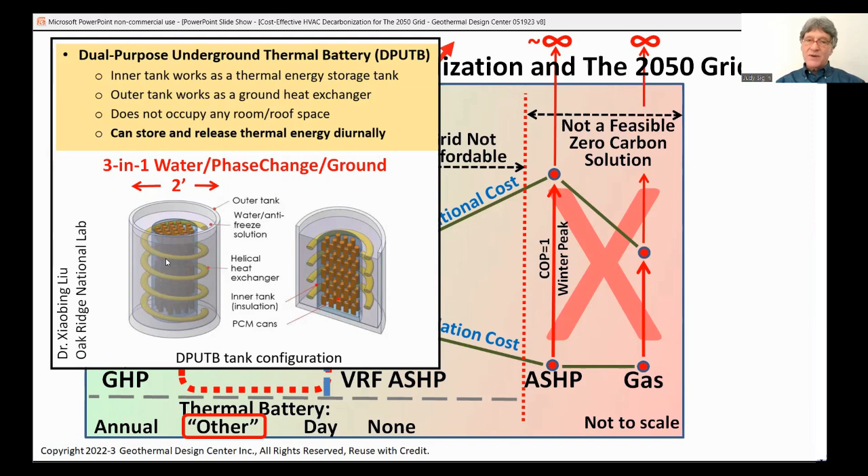And you could size the different components for what you want. You can create different sizes, you can put in more of them. So that's one way people do this kind of stuff, or will do this kind of stuff.

And there's another way people use these geothermal systems. They can design fields so that you put all the hot in the middle, for example, and you put all the cold on the outside. You can design these fields that are gradiated, and you can get better, more efficient recovery of your energy out of them. So there's a lot of variability in this stuff, a lot of engineering that can be done by people who know this, but there's only like 1,500 people who know this stuff at most.

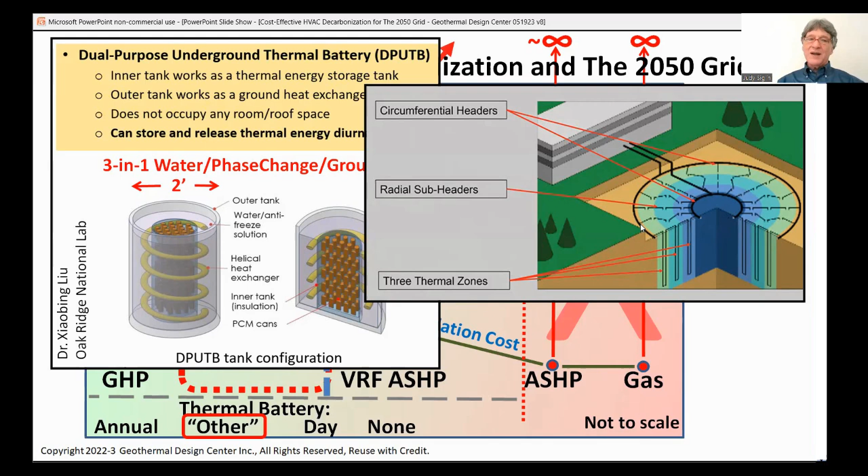So we've got to figure out how to get all the engineers on board. So there's those batteries, and they're tuned. The idea is to design a tuned battery for your situation: your renewable power fluctuations, your weather fluctuations, your building usage fluctuations.

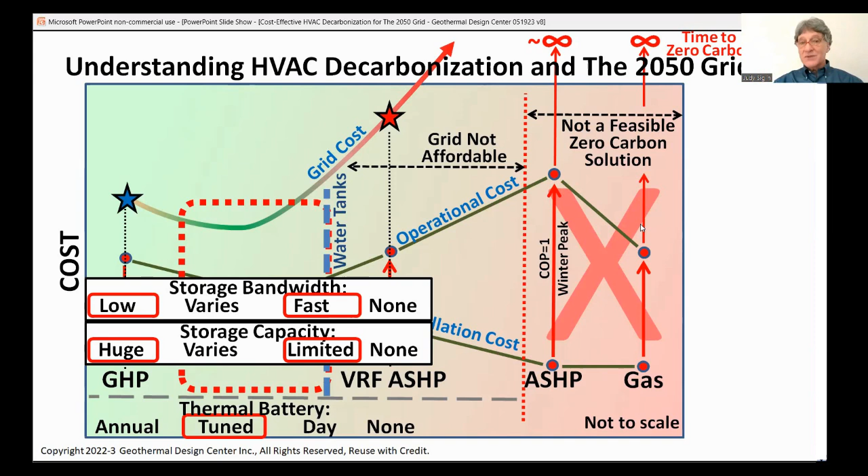The parameters include, for example, the storage capacity, which ranges from huge to limited, and the bandwidth. So for storage capacity, the water tanks are very limited, whereas the ground loops are huge because you've got this huge chunk of rock involved with your system. And the bandwidth, in other words, how fast can you get the energy in and out? Very fast for a water tank because you can just pump the water right into your heat pumps. Very low for the ground because you've just got this one little loop in a 20 by 20 big chunk of ground. So these things are all design parameters.

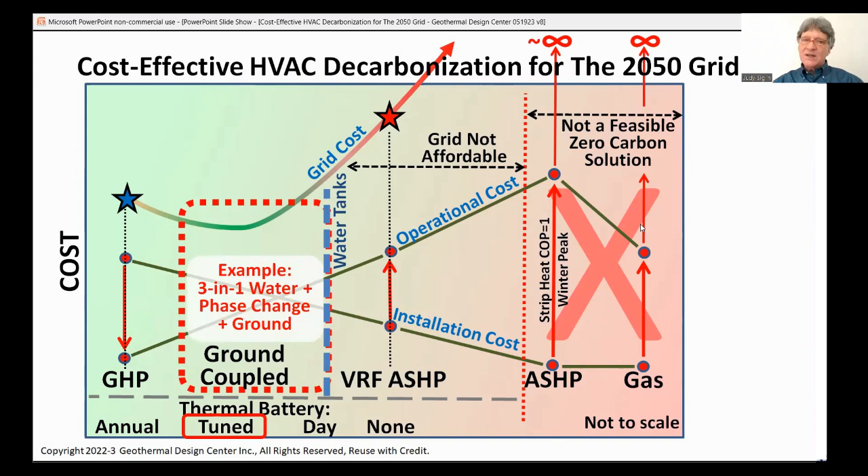And the reality is you've got to figure out how to do that. And here's the example conclusion: if you took that 3-in-1 battery Dr. Liu did, phase change plus ground plus water, that should be able to produce this kind of an optimum point. A properly tuned one should be able to produce this optimum point for heat pump storage. A ground coupled, but also water battery combination.

And this produces what we would call the ideal goal cost, the ideal overall minimum, the minimum grid cost to get to zero carbon, and the minimum installation cost. A large percentage of systems need to be in this class, or this class, or we're not going to be able to build this cost-effective grid.

So looking a little bit differently at methods. These tuned thermal batteries, designing how much water battery, how much deep geothermal: design factors on the right here. Here's kind of a list of what all's involved. There's the local weather, there's which technologies you're using, phase change or not, water, different grades of heat pumps. What's at your physical site? For example, at MIT, they have some very poor rock 100 feet down, and you can't really drill it cost effectively, so you just don't do those deep bores there. You do different stuff. They have 100 feet of very saturated clay that you can use.

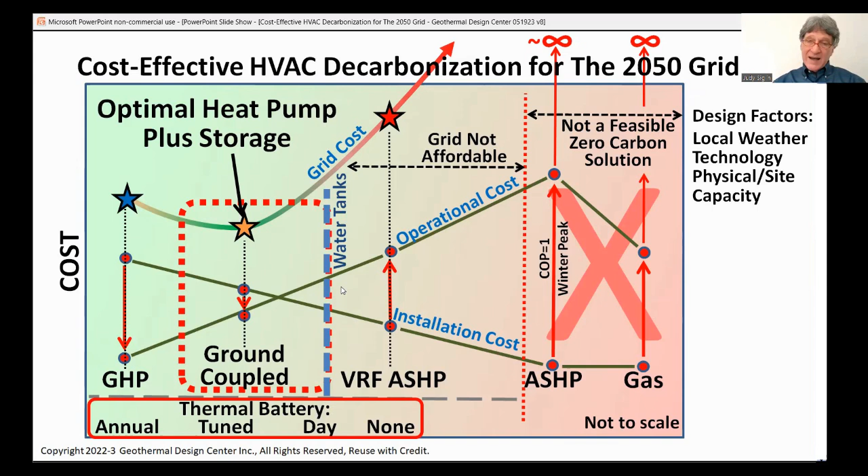Capacity: what are the capacities you need of each of these different ones to meet the fluctuating power and the fluctuating usage and all that? You can see it's a complex model. What's the bandwidth you need to meet the cost models? How do you tune them? How much resilience do you want? In other words, how much reserve capacity do you want for these long periods? Or let's say a piece of equipment fails, pumps fail, whatever, you need to have resilience.

What are the installation costs, the operation costs, the grid costs in it? And all of these together control how fast we are going to be able to decarbonize buildings. So understanding how to put this all together is the critical key to rapidly decarbonizing buildings. Clearly, this is a complex model, and there's just no engineer anywhere who's going to sit down and design with this level of complexity involved. So this is why it requires this level of design to do it.

And this is why we are working with the D Lab at MIT and developing an interactive HVAC decarbonization decision support tool. It's a high-level tool to let even lay people use it, in the style of En-ROADS. You should check out this En-ROADS style thing. It's a single-page interactive simulator where you select your weather, you load your building data, even if it's just from monthly bills, or whatever it is you've got. It models the building for you, and then you can project different combinations of these batteries to get a tuned result.

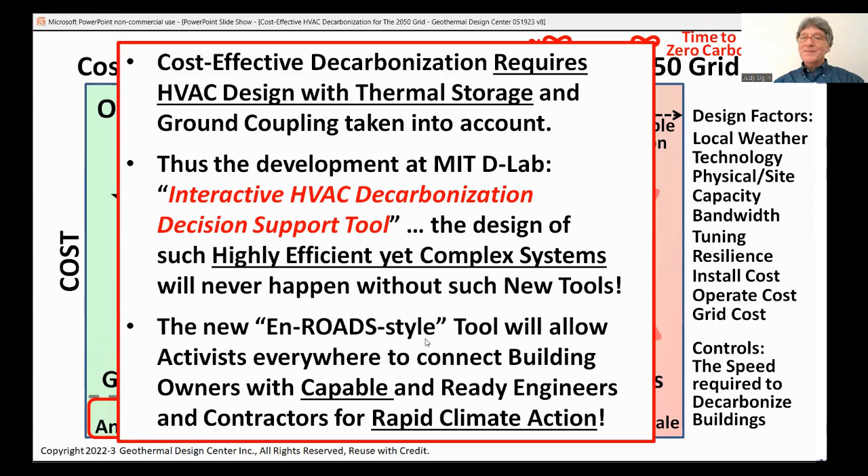Of course, we're going to add AI as soon as we can to get this right. That's what it requires, developing that. That's what we're out there trying to do. Needless to say, it's complex. This is what's needed. We're not going to get to the zero carbon world quickly and cost effectively without this level of understanding of HVAC. Unless you just go to geothermal heat pumps and you do it right. Unfortunately, a lot of people don't do them right.

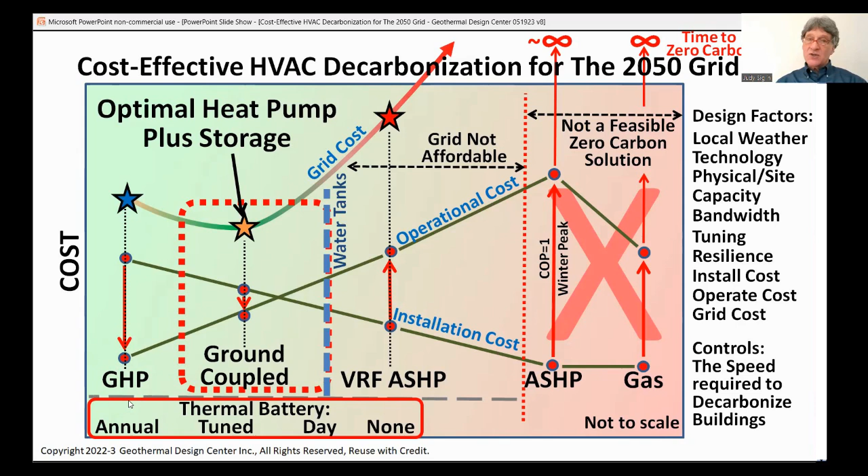So the one thing you really want to know is you want to have experts involved in this. None of these are simple. Make sure you have experts involved that have the specific knowledge about what they're doing, especially in geothermal. A lot of engineers have never taken the certified geoexchange designer course. They don't know what they're doing, and they screw these things up. It's unfortunate. Thank you.